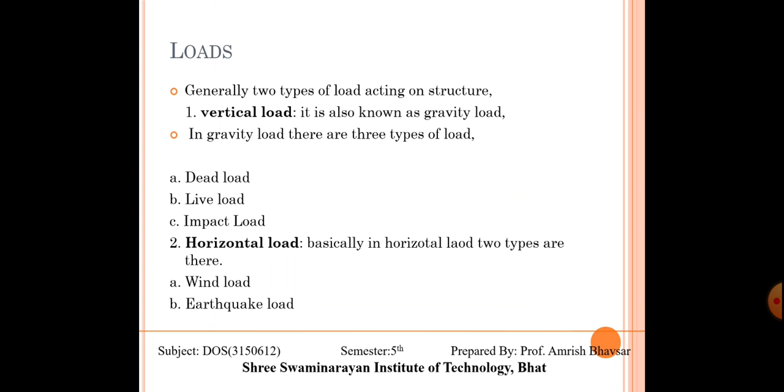In gravity load there are three types. First one is dead load, second one is live load, and third one is impact load. In horizontal load also there are two types. First one is wind load and second one is earthquake load. This is the basic load.

Other than this load, some more loads are acting on the structure, especially for the steel structure, that is erection load, temperature load, accidental load, and secondary effects, meaning secondary stresses acting on the structure. Let's try to understand all these loads.

So first, in gravity load there is dead load. Dead load is normally the self weight of the permanent construction elements. It is the self weight of structural elements like floors, roofs, dividing walls, beams, columns, balconies, lintels, and footings.

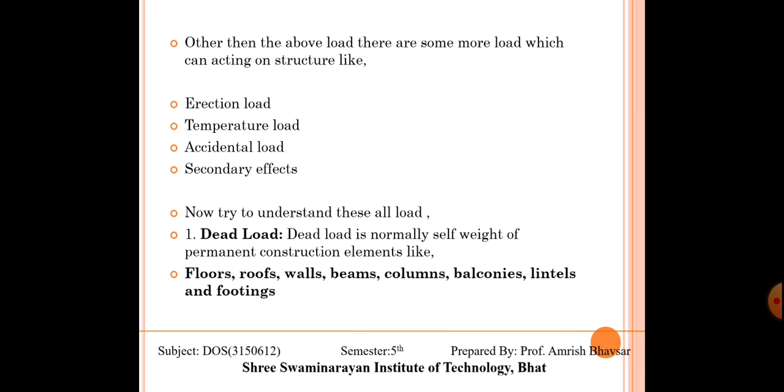These are the structural elements which are constructed for the building and permanently rest there, and their self weight is considered as dead load. For the calculation of this dead load, we should have the unit weight of the elements. For getting the unit weight, we must have IS 875 Part 1.

In this code, there is the unit weight of all the materials used in a building. Now, what is a code? Which are the codes for civil engineering? These codes provide us the specific research value for the particular case.

Here IS 875 is specially for the loads. Right? In this, IS 875 Part 1 is specially for dead load, and in that code we have the unit weight of specific construction elements. So we can calculate dead load for this structure, like

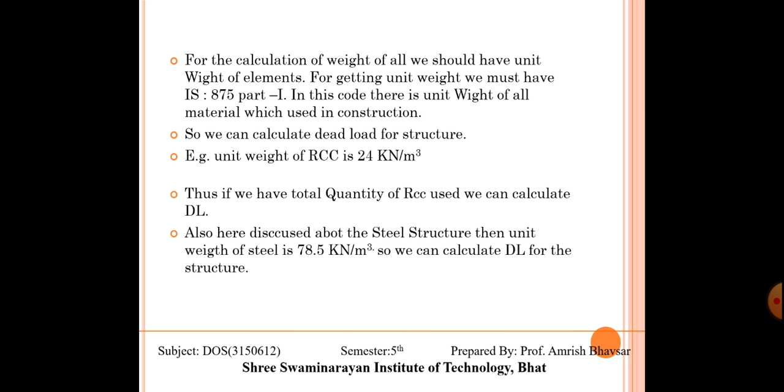Number 2, live load. It is also known as imposed load. Live load acts due to moving elements. Which elements? Those moving from time to time on the floor, like the weight of a person. It can be moved from this place to another place, and the furniture, it is also movable.

For the design of the structure, we can take the minimum value of this live load from IS 875 Part 2. Part 1 is for dead load, and Part 2 is for live load, meaning imposed load. This code gives us the value of load for the following classification. Live load or imposed load may change with the purpose of the building. First one, residential building. We are all aware of the residential building.

In residential building, the live load is 2 kilonewton per meter square. Live load is always acting on the floor, so it is in kilonewton per meter square. Number 2, office building. In an office there is more furniture and staff as compared to a residential building. That's why there is 2.5 kilonewton per meter square imposed load.

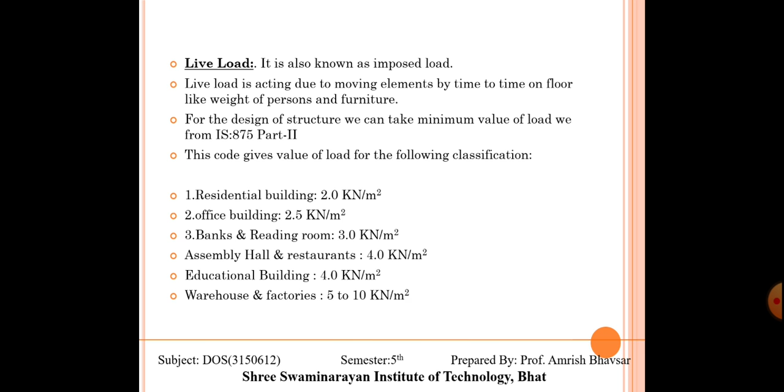For that, there is a maximum imposed load of 5 kilonewton per meter square up to 10 kilonewton per meter square. That depends on the type of structure and type of factory. Number 3, which is most important for the steel structure, is wind load. We know about the wind. Wind load is considered in the design of tall buildings.

Normally we have seen buildings of 1, 2, 5 up to 10 floors. But in some places there are about 50 floors, about 100 floors. There is a maximum chance of wind attacking that particular building, so it must be calculated through wind analysis, and this wind analysis is calculated with the help of the code.

The force exerted by the horizontal component of wind is to be considered in the design of the building. It depends upon the value of wind and the shape of the building. Both are most important: value of wind and shape of the structure. It also depends on the size of the structure. The complete details for calculating this wind load on a structure are given in IS 875 Part 3.

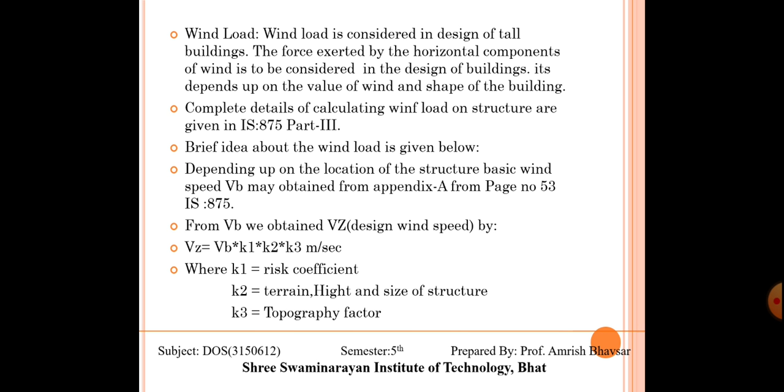Number 3, topographical factor K3. Suppose our building is on plain ground, then theta is 0. If our building is on sloping ground, then there is some inclination for that particular building. So this factor is also calculated from IS 875 Part 3. After getting this wind speed, we have to calculate the design wind pressure, and for that we have the equation Pz is equal to 0.6 into Vz square,

which is also given in IS 875 Part 3. Up to a height of 30 meter, the wind pressure is considered to act uniformly. But beyond 30 meter, the pressure increases, because up to 30 meter there is obstruction from the surrounding buildings, but beyond 30 meter there is only a little obstruction. So the wind pressure acting is more as compared to below 30 meters.

Effect of this wind on the structure, which is bending of the steel structure and its members. Due to this wind, our building deflects in the horizontal direction. Number two, blowing of the roof sheet, as we know. Failure of the steel tower structure. Fourth, tilting of steel towers. This also we know about.

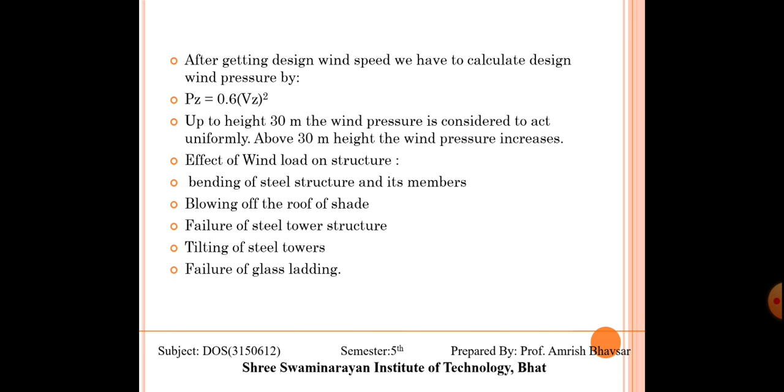Failure of the glass cladding. In today's scenario, there is glass cladding in all the buildings, as you have seen. So, due to that wind, that glass cladding can be broken by the wind pressure.

Next is earthquake load. Earthquake causes ground shaking. It causes shaking of ground in three directions. Sometimes ground shaking in X direction, sometimes ground shaking in Z direction, and sometimes ground shaking in upward direction, that is Y direction.

For the designing of earthquake resistant structures, there are two methods. First one is seismic coefficient method and the second one is response spectrum method. All the lateral load calculation regarding these two methods is given in IS 1893 2000. It is also a special code for earthquake resisting structure design. In this code, there are criteria for these two methods, as we discussed, seismic coefficient method and response spectrum method. We have the calculation, and from that calculation we can calculate the earthquake resistance criteria.

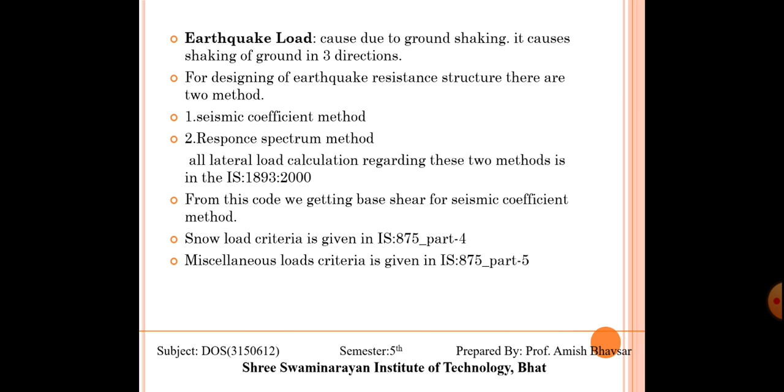Next, snow load. For this snow load, we have criteria. It is given in IS 875 part 4. Part 1 for the dead load, part 2 for the live load, part 3 for the wind load, and part 4 for the snow load. And remaining other loads are called miscellaneous loads. All the criteria of those miscellaneous loads are given in IS 875 part 5.

Now, for the designing of a structure, the structural engineer must combine these loads for the designing of particular elements. There are load combinations given in IS 800 2007. Now, what is IS 800? IS 800 is a specific code for the designing of steel structures, which was recently modified in 2007. For the designing of steel structures, there must be a load combination recommended by IS 800 2007. Load combinations are given below.

First, 1.5 dead load plus live load plus 1.05 crane load. Steel structures are warehouses or factories, so there should be a crane for the lifting of materials. So we must take that crane load into consideration in the combination. Number 2, 1.2 dead load plus live load plus 1.05 crane load plus 0.6 wind load or earthquake load.